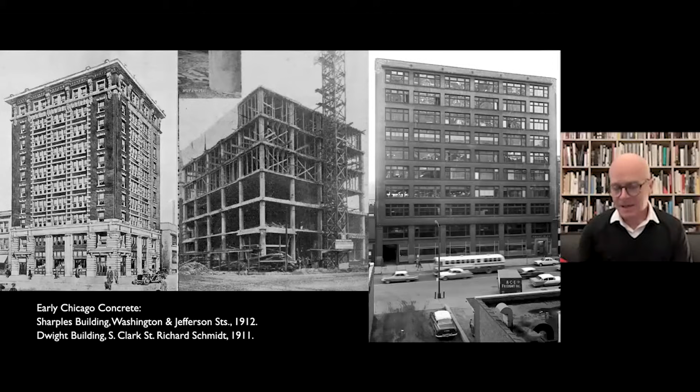The other strand that I want to bring in is Chicago's housing history. And from a very, very early point, concrete proved to be a good match for Chicago's housing needs, whether it was middle-class housing like the Michigan Boulevard Garden Apartments, this fairly well-known experiment in public-private housing in Bronzeville from the late 20s, or whether it was more luxury housing like the Powhatan Apartments, by Robert De Golyer, one of the great 1920s, 30s era Art Deco and neoclassical architects of Chicago's apartment towers, who used concrete and particularly flat plate to squeeze as many lettable floors into his designs as possible.

And finally, I want to look at one figure who's an important transitional figure between the pre-war and post-war eras, and that's Henry K. Holsman. Holsman was trained as an architect, but had a brief flirtation with the automotive industry. The Holsman Automotive Company lasted only a few years in the early parts of the 20th century. But when Holsman returned to architecture, he came back with a real sensibility about automotive engineering and wanting to apply the efficiencies, and particularly the assembly line efficiencies that he had seen beginning to grow in the automotive industries, to residential construction. In the early 1940s, the Chicago Housing Authority hired him to design the Cabrini row homes.

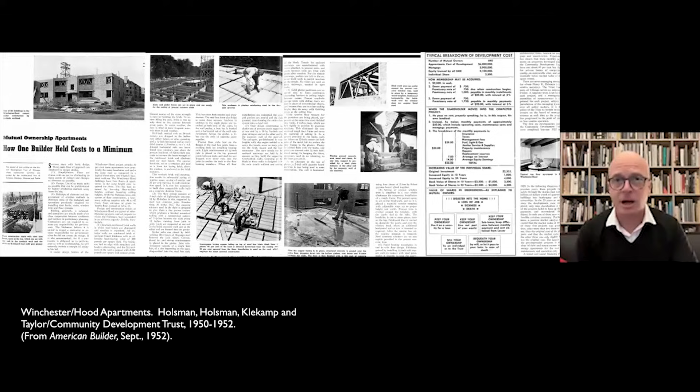Legend has it that he contacted Frank Lloyd Wright and Eero Saarinen and Walter Gropius, all of whom turned him down. But Greenwald then contacted Mies van der Rohe, who at the time had never built a high-rise building. And Mies came on board as the design architect, but in conjunction with 2 other firms, Pace Architects, who were a group of Holabird & Root alumni who were very good at construction drawings, and Holsman's firm, both for its expertise in setting up the co-op, the corporation that would run the development, but also for his expertise in building efficiency and construction efficiency.

And when a couple of students and I unpacked the Promontory construction and looked in detail at both how it was built and how Holsman's ideas about concrete formwork might have transferred from the low-rise projects he was doing in the 40s into this high-rise, it's pretty convincing, I think, that Holsman was behind a lot of the tectonics of Promontory, that it's an exposed concrete frame, plain building in Mies's words, but also a building that doesn't require additional cladding.

It is, as you can see, a pan joist system, a system that Holsman was very familiar with. And it was very repetitive. The formwork could be used again and again and again by a relatively small labor crew who could pour one floor, wait for that to cure, and then take the forms and move them up 3 or 4 floors to another floor under construction a week or two later.

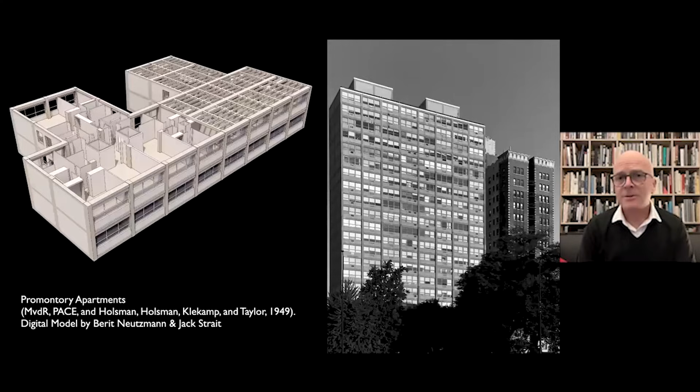Even as Promontory was being completed, however, the city was going toward a more liberal performance code that opened up the possibilities for different fire suppression techniques and would eventually allow the floor-to-ceiling glass that we're more familiar with in high rises today. There's also evidence that Mies was quite happy with this formula because he and Holsman and Pace worked on other projects that literally repeated the same formula again and again.

The Algonquin Apartments, a set of 6 towers that are just north of Promontory, a project that Mies later disowned for reasons that involved adding apartments to the ground floor late in the day. Nevertheless, these are reasonably sophisticated designs, and they borrowed both Holsman's skill at concrete construction and his skill at putting cooperative agreements together.

Chicago's more liberal code was passed at the end of 1949, and very quickly Mies's formula changed. Here at 2933 Sheridan, the kind of hidden Mies building, the one that rarely gets talked about, you can see that Mies still has the concrete flat slab, still has the exposed frame or the expressed frame, but now instead of the brick sill, the glass goes from floor to ceiling. And this was a major selling point in the architecture.

The exposed frame also became a sort of trope in public housing, and SOM's built project for Ogden Courts, by their own admission, was taking Mies's Promontory model and repeating it for public housing, for affordable housing in the city. Ogden Courts were one of several projects that Progressive Architecture in 1951 really gave Chicago credit for leading the way in literally progressive housing projects, trying to combine the latest technology, the latest ideas about architectural development into housing for, in particular, the residents who had come in the Great Migration and who were forming really the bulk of the housing problem for Chicago.

Ogden Courts, as you can see, had an exposed frame, brick sills that were more about saving money than they were about fire resistance. But you can see that the Promontory model here is very clear, that the concrete is exposed, it's allowed to sort of speak plainly for itself, and it's repetitive. The formwork was used over and over again to build Ogden Courts.

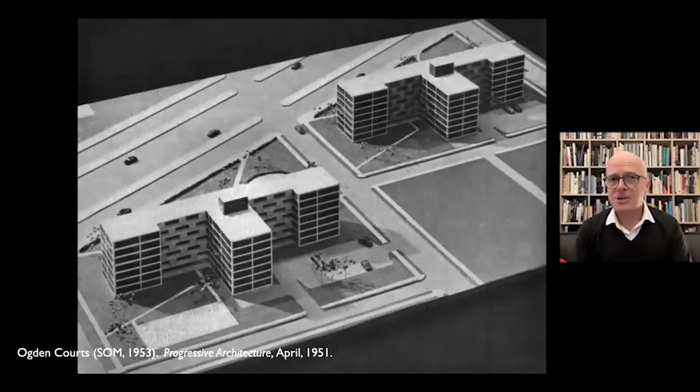So chronologically, this is when 860-880 Lake Shore Drive comes in. And looking at these buildings, I think we can see in this context that they are really anomalies, that they're unusual. They use steel for their framing, steel decking for the flooring, concrete floors, but not the flat plate construction that we saw. Instead, the concrete is combined with steel reinforcing and supported on steel beams and girders. The cladding is also steel. That's an anomaly. That's a slightly different story.

Aluminum cladding was just coming online and would really form the bulk of high-rise curtain walls throughout the late 1950s. So 860-880, even though they're phenomenally important as works of architecture, don't really fit in the story of residential construction in Chicago or elsewhere. We build residences out of concrete.

And even at about the same time that the 860-880 were receiving the most excited press, Architectural Forum runs an article on Chicago architecture. They find 8 apartment buildings, and they pick a couple of Mies buildings, but they're concrete Mies buildings. They're dorms at IIT, and they're a project that we'll look at here in just a second, 900-910, the buildings that are across from 860-880, and that really show the change in Mies's office and his sensibility about what really made for appropriate technology for residential construction.

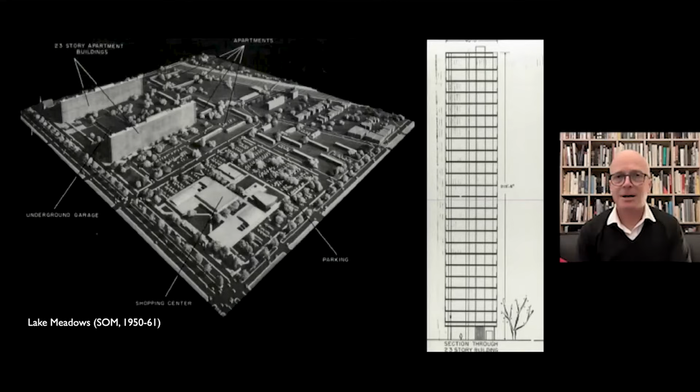Ultimately, New York Life balked at this. They wanted a more phased approach that would allow them to build one or two units and see if they worked first. And what was eventually built were these four concrete towers with glass and steel curtain walls that used flat plate construction to achieve the maximum number of floors within an affordable height.

Lake Meadows was also integrated. It was designed primarily to house Black families on the South Side, but it was also a successful project from the city's point of view in that it attracted white residents as well, something that the city was sort of desperate to achieve in the 1950s.

This image on the right is actually from Ebony magazine that talked about the provision of new modern apartment buildings in Bronzeville as something both progressive from a housing policy point of view, but also from a technical point of view. And they made a big deal of the fact that the concrete construction made it easy to clean, easy to heat and cool, and that the provision of these kind of technically modern buildings showed that Chicago was serious about addressing some of its housing problems.

The legacy of 860-880 is interesting in other ways, though, in particular in the sort of competition that it inspired. And one building in particular that showed both what concrete could do and also ways in which 860-880 were sort of dead ends in other technical ways as well was 320 Oakdale Avenue, again in Lincoln Park, by an architect named Milton Schwartz. Schwartz was the son of a heating and cooling engineer. The Schwartz brothers had a contracting practice, a heating and plumbing contracting practice. And Schwartz had his eyes set on a piece of land across from his apartment in Lincoln Park that he convinced his uncle and his father to sort of go in on with him.

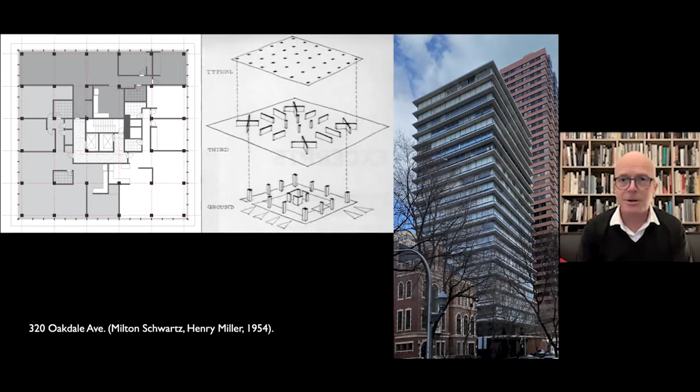So here you can see the building today. The concrete structure allowed for both these cantilevered sunshades that stick out on all four sides, which technically isn't exactly right, but certainly gives the building some shade from the south summer sun at least. But it also allowed the building to tuck in at the base. And this then permitted a driveway to go around the main entry lobby. One of the first buildings in Chicago to really acknowledge the importance of the automobile in the post-war era. The concrete structure allows the cantilevers, it allows these transfer systems. But maybe more important was the way that the building was sold.

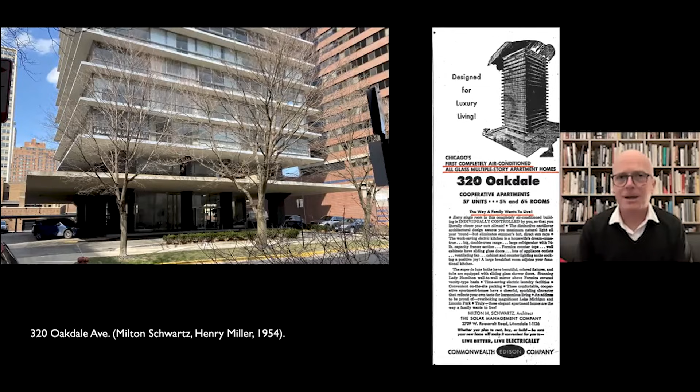Here you can see that Commonwealth Edison, the utility in Chicago, is actually treating the building as an example of where it sees its market going, because it's showing you that the building is the first all-glass, fully air-conditioned building in Chicago. 2933 Lakeview, the concrete Mies building, was not originally air-conditioned. 860-880 Lake Shore Drive notoriously wasn't provided with air conditioning. 320 Oakdale was. And I think that it really set the tone for the next generation of high-rises in Chicago.

Here from the sales brochure, you can see that it's advertised as being cool, completely air-conditioned, all-glass, multi-story apartment building, Chicago's first, and new, that the concrete structure allows for these cantilevered sunshades that help keep the building cool in the summer, but also that give it its distinctive profile on the skyline in Lincoln Park.

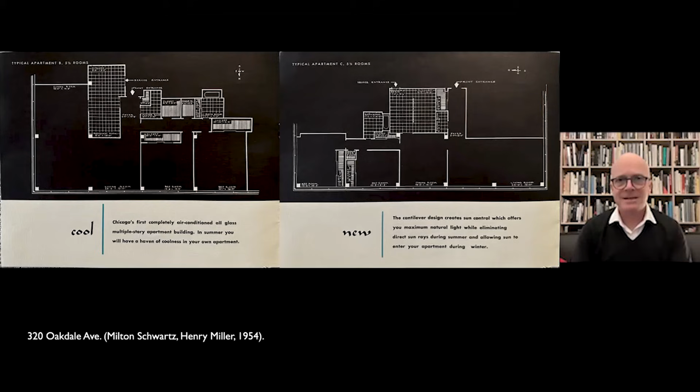How influential is 320 Oakdale? Well, just as it was finishing up, Mies and Herbert Greenwald embarked on their next pair of projects: the Esplanade Apartments right across the street from 860-880 Lake Shore, and Commonwealth, which were just a couple blocks from 320 Oakdale. And these buildings all took advantage of flat plate concrete construction. They all also featured integrated air conditioning. And as you can see here from the construction photo at Esplanade, they featured prefabricated aluminum cladding.

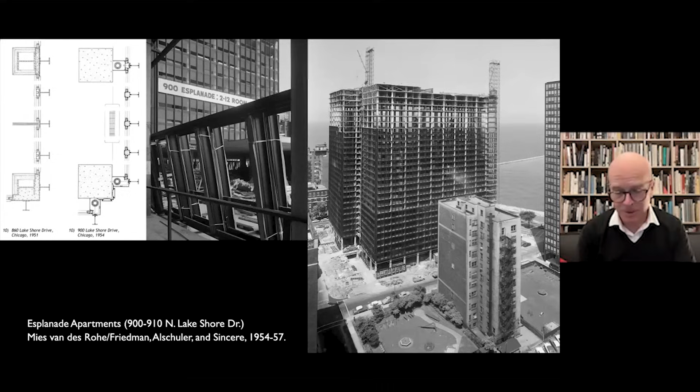So in just a few years, right, 860-880 is done in 1951, 1952. A year or two later, after the competition sort of shows its hand at 320 Oakdale, Mies and Herbert Greenwald and a new architectural firm — Holsman had gone bankrupt in the meantime — Friedman, Alschuler, and Sincere took a lot of the ideas that Greenwald had absorbed about trying to model the automotive industry and put them into use here with prefabricated cladding panels and integrated mechanical systems. And the flat plate was really a key part of that.

If you look at the plans, very famously shown on the left, the difference between the steel construction at 860 Lake Shore and the concrete construction at 900-910. And you can see that the plumbing for the air conditioner sort of pushes the curtain wall out from the structure, makes it into a maybe less architecturally rich curtain wall, but one that technically I would argue is a little bit more advanced in how it integrates mechanical and structural and cladding functions.

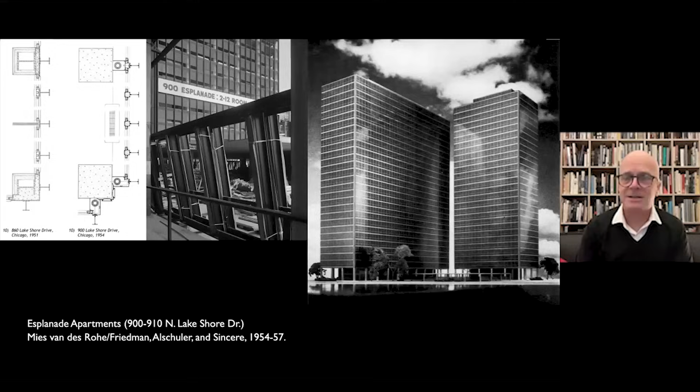Steel columns tend to be smaller than concrete. Steel is stronger than concrete. And you would think that that would lead you to consider steel as a material for apartments. What you rarely see, however, is the section of 860 compared with the section of 900-910. Steel gets its strength from depth, from being able to take a very small amount of steel and stretch it out in section into an I-beam. It resists bending basically by putting as much depth between the top and bottom flange as possible. At 860-880, that led to a floor depth of 20 inches.

In commercial construction, that's not a problem. We have to weave ductwork through the structure to get air conditioning to various offices. And so we can use that 20-inch depth. We can cut holes in the web of the steel beam to get ductwork where it needs to go. In residential construction, particularly if we're getting air conditioning and heating through plumbing, through moving water through the building, we don't need ductwork. And you can see here in the comparative section that 900-910 uses a 10-inch thick concrete floor slab, in place of the 20-inch deep steel and concrete that goes to the floor construction at 860-880.

Greenwald also kind of turned the thumb screws a little bit on the floor to ceiling height. It's 4 inches shorter at 900 than it is at 860. But you can see that there's a tremendous savings in the depth of the floor itself, that they save 10 inches out of every floor by switching from deep steel to relatively shallow concrete. The concrete plate is heavy, so it needs the bigger columns. There's a space penalty to pay there. But 900-910 is shorter than 860-880 Lake Shore Drive, and it has 2 additional stories. So that's 2 more floors that originally could be rented out.

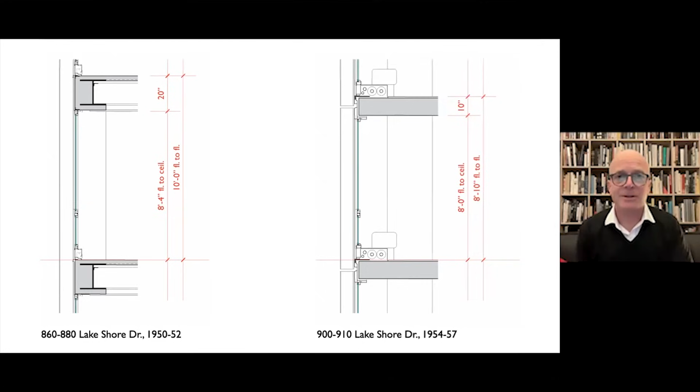And this means less cladding, less elevatoring, less stairs, right? There's less material in 900-910 in terms of its cladding and all the vertical risers, but there are more units. And this really is the reason that we use flat plate construction wherever we can in residential, that it's the most efficient sectional way to put as many floors on top of one another in a given height. No other major steel residential high-rises were built in the post-war era in Chicago after 860. And if 320 Oakdale hadn't been proof of concept enough, the buildings at 900-910 and at Commonwealth Promenade sort of sealed the deal. And concrete became the material of choice for every residential high-rise in Chicago afterwards.

The other thing that happens around the same time is that Chicago's approach to housing changes. And it changes with a new mayor, Richard J. Daley, who takes office in 1955 and has a real vision for revitalizing the Loop that's going to involve trying to convince the middle class not only to stay in the city, but to provide for middle-class housing within walking distance of the Loop.

The same idea behind Lake Meadows, but with the Daley administration, they are going to accelerate that and try to make it so that corporations want to stay downtown because they have a natural kind of population at all kind of levels, that their secretaries can live near downtown, their managers can live near downtown, and even their executives can live downtown. The so-called Central Area Plan, which is Daley's plan for kind of revitalizing and nourishing the Loop, has housing as one of its main goals.

And throughout the kind of orbit of the Loop, you see in the early 1960s and beyond a lot of projects that I think can rightly be called Daley projects. The greatest of these is Marina City. This is the kind of original proof of concept, if you will, of Daley's idea. It's literally right across the river from the Loop. And concrete plays a really key role in its construction.

Bertrand Goldberg, the architect, as you may have heard in Jeff Goldberg's talk a few months ago, had a vision for Marina City being literally a city within a city. So commercial activity, residential activity, entertainment activity, all going on within the same complex. His idea about the towers was part structural, that the cylindrical tube is an ideal structural form, but also partly constructional. If you look at the construction photos, you can see that there are what we call slip forms today.

These are forms that literally travel up the cores, pouring a little bit of the core at a time. And as those cores strengthen and cure, the form relies on those to sort of jack itself up and pour more core as it goes. This is a technology that's borrowed from grain elevator construction, something that was pioneered in Chicago. And it becomes very quickly the standard technique for pouring concrete cores in particular in skyscrapers.

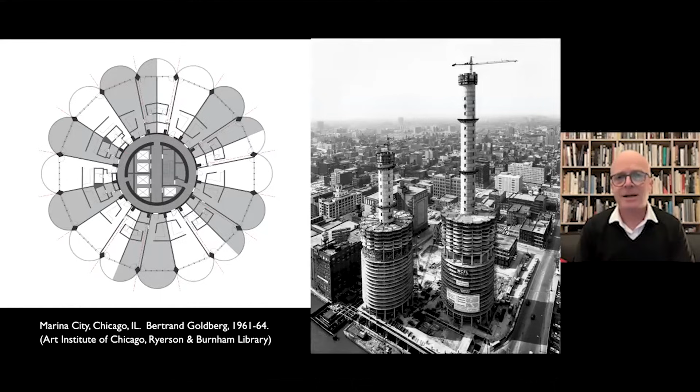The other kind of big advance here is that the contractors, McHugh Construction, developed fiberglass forms to achieve the complex curving shapes, especially of the balconies. And they did this by building the balcony in timber one time, using that to create a number of fiberglass forms that they could then use over and over again. So advancing not only the structural potential of concrete by thinking about it as a tube shape, but also advancing the construction aspect of it by repeating the same form again and again and bringing mass production in a way into the construction of these towers.

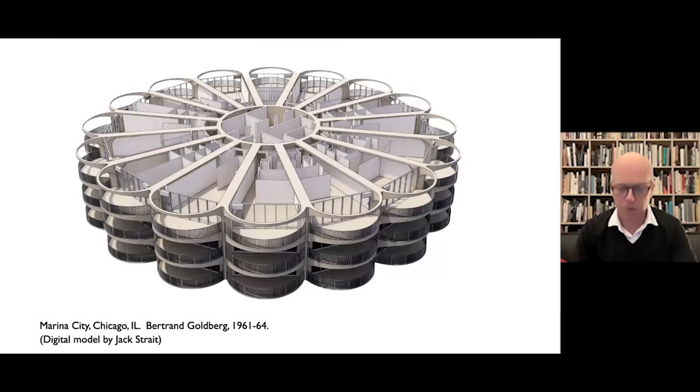Here you can see a little bit more detail on the construction. Again, this is a model by these two students who work from original drawings so that we can sort of investigate and find out what's behind the skin in some of these towers. And you can see the curving beams that support the balconies that were only possible with this fiberglass construction that McHugh was able to put together.

There was also a major development in the financing that took place at Marina City. The lead developer was a janitors union downtown who had interests, of course, in the Loop staying populated so that their union members continued to have work. But it was also the first high-rise to enjoy Federal Housing Administration mortgage protection.

In 1961, Daley and several of his administration went to Washington to convince the new Kennedy administration to open up the mortgage insurance program that FHA had put together to that point only for single-family dwellings. FHA was convinced that high-rise housing was a solution to the crisis in America's cities. And Marina City was the first to have its mortgage backed by federal protection, which enabled the developers to get lower interest rates and therefore really enabled the construction itself.

Because it was FHA insured, Marina City had to be integrated. It would have been anyway. The janitors union was an integrated union, but Marina City was one of the earliest projects within walking distance of the Loop to accept both white and black tenants.

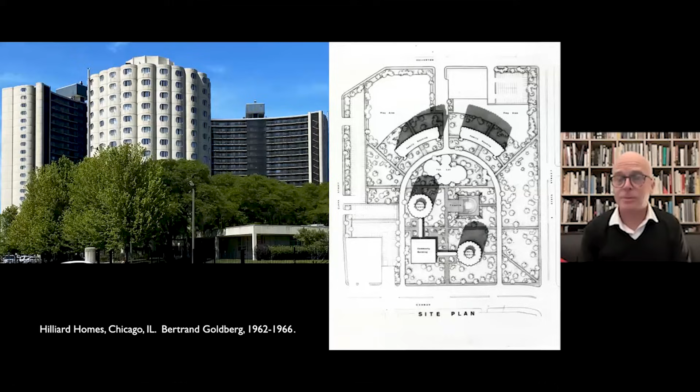And also relied on, as you can see, bearing walls, right? Returning the function of structure to the exterior wall, the opposite of the advances in curtain walls, lightweight skins that don't contribute to the structure of a building. Here, Goldberg realized that the one way to save money would be to go back to the idea of the structure and the skin being the same, and to use concrete as an exterior wall that would not only keep the rain out, but would also actually structure the building, that would hold it up.

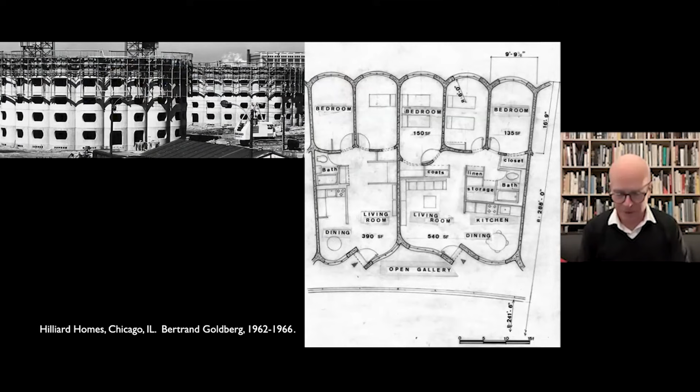So on the left, these are actual construction photos showing the slip forms kind of extruding the same plan over and over as they go up. And on the right, you can see, very much like Marina City, Goldberg using the plasticity of concrete, its ability to take a variety of forms, to shape the units in the Hilliard Homes to the kind of programs that he derived from interviewing the tenants themselves.

The idea of concrete as a bearing wall comes back in other places as well. There's a kind of innovation that happens first in New York. I have to admit that New York takes the lead in this, where I.M. Pei and the engineer August Komendant develop what they call mullion structures for the Kips Bay apartments on the east side.

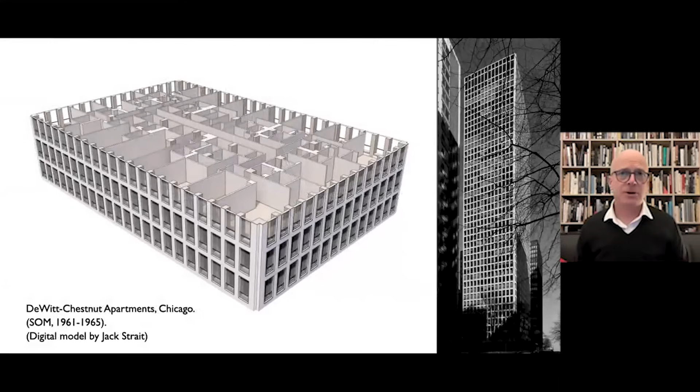A tube structure is basically a mullion structure like Kips Bay, but where all of the exterior walls are working together, basically making the building into a giant hollow column. By pushing all of the structure to the exterior skin of the building, the structure not only resists gravity very well, but it's also very efficient against wind. If you think about taking a paper towel tube, you can stack a book or two on top of a hollow paper towel tube.

If you cut the tube lengthwise and roll it up really tightly, you can't stack anything on it. The tube will buckle, it'll bend out of the way, and the books will collapse. The same principle essentially works in column design, where we try to find shapes where the highest percentage of material is out at the perimeter of the column.

And it works in what came to be known as tube structures that Fazlur Khan, if he didn't exactly invent, certainly came some way toward perfecting in Chicago. By moving all of the structure out to the perimeter, you make the building work like a giant paper towel tube that can resist not only gravity, but can also resist bending forces from wind very efficiently.

DeWitt Chestnut, a 40-story apartment tower, in some ways a successor to Commonwealth and to Esplanade. It's built by Metropolitan Structures, the successor firm to Greenwald's, and it's on the same site as 860-880. It's just behind it. Bruce Graham, the architect, wanted to build skinnier and taller to avoid blocking views from 860-880.

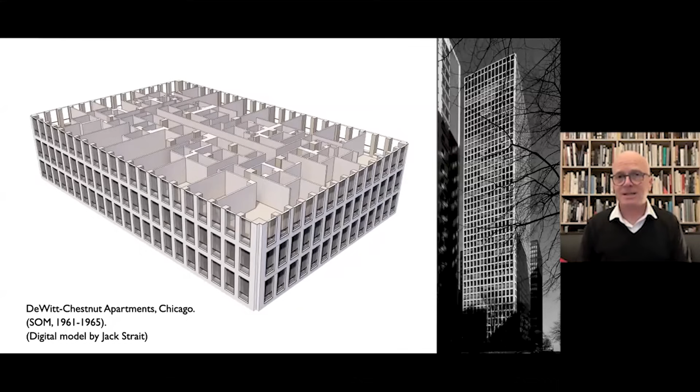And Fazlur Khan's response was to develop a concrete tube structure where the skin is basically a bearing wall, but with hundreds of windows in it, that relies on heavy reinforcement and some upstand spandrel beams to create stiff connections that make the building essentially work as four interconnected tube-like shear walls.

There are other developments at the same time that begin to take concrete in similarly sophisticated directions. There's one project in particular, Lawless Gardens in Bronzeville, developed originally by an IIT grad, a South Side architect named John Moutoussamy, who joins forces with a residential firm called Dubin Black to develop the scheme for another public-private partnership that is so successful that, initially conceived of as two towers with some row houses, by the time it's under construction, there's clearly enough demand for a third.

And these three towers sort of mark the Bronzeville skyline, but they're also very sophisticated exposed frames. They've taken the Promontory formula and they have adapted it. They've refined it. The detailing on these goes beyond even what Mies was doing 20 years before. And in fact, these towers were awarded the gold medal by the AIA Chicago in 1970, beating out the John Hancock Center, which I think most people would recognize today over Lawless Gardens.

But the detailing here, the conception of the concrete frame, its integration with the cladding was enough to convince the jurors that this project was the most important and the best project of the year in 1970 after they opened. Dubin Black and Moutoussamy would go on to borrow the mullion frame idea and sort of make it their own.

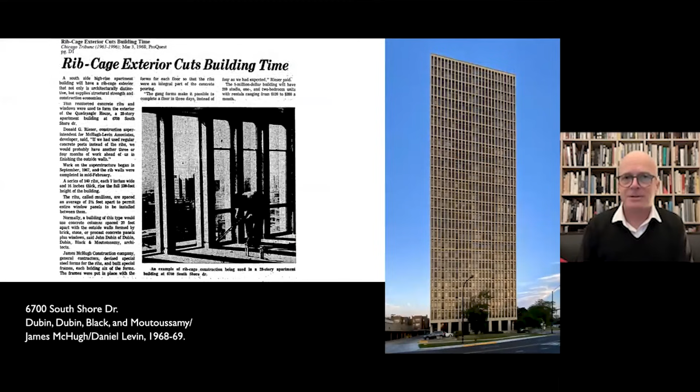The lead architect John Dubin and his partners developed not only the rib cage as a structural ideal, but again, working with McHugh Construction, also developed ways of flying the forms so that they could speed construction and build these rib cage buildings faster than they could in typical flat plate construction. Using steel formwork and the so-called flying or jump forms, where you can take the formwork out of one floor, fly it up three more floors to start a new one, they were able to set records with these towers.

The technique was so efficient, both in terms of time, but also in terms of material usage for the amount of structure that they needed, that this proved to be a remarkably successful formula, almost no matter what the budget.

Other things that happened in 1965: Illinois passed condominium legislation. It was one of the first states to do so. And this made buying a unit in a high rise much easier than the co-op system. And this too led to a kind of explosion in high rise construction, because condominiums, if you're a developer, are much easier to get in and get out of, instead of having to set up a corporation to run the co-op.

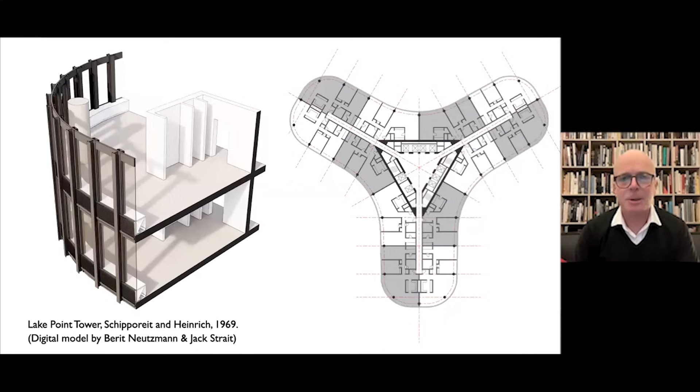Mies had proposed in 1922 a sort of curving skyscraper that a lot of critics have compared Lake Point Tower to. George Schipporeit points out that this was originally supposed to be a four-lobed tower, and that to save construction costs, they simply cut one off. He claimed that any similarity to the Mies Tower was pure coincidence.

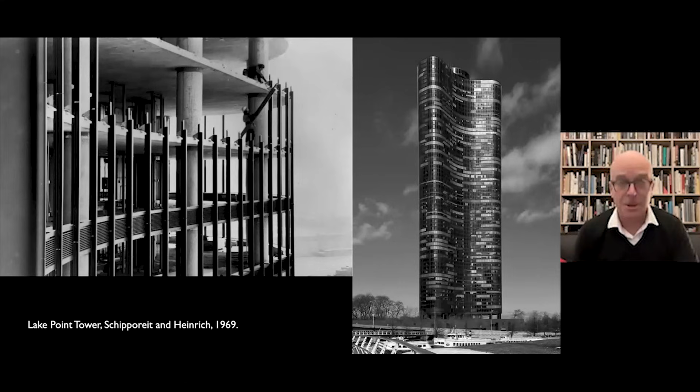But I think you can see in the construction photo both how concrete enabled a really simple construction, a very, very efficient construction. Again, you can see the 9 or 10 inch flat plate allowing the maximum headroom and the minimum floor-to-floor height. At the same time, Schipporeit and Heinrich realized that the flexibility of concrete formwork could lead to more interesting forms, voluptuous forms, in the case of Lake Point Tower.

And I think one important thing to understand about Chicago's skyscrapers, but also skyscrapers in almost any city, is that the commercial high rises were often just a small fraction of a city's total high-rise construction, and that residential construction, and especially concrete residential construction, very often filled out the bulk of the city's neighborhoods, but also usually outnumbered by far steel construction or commercial construction downtown.